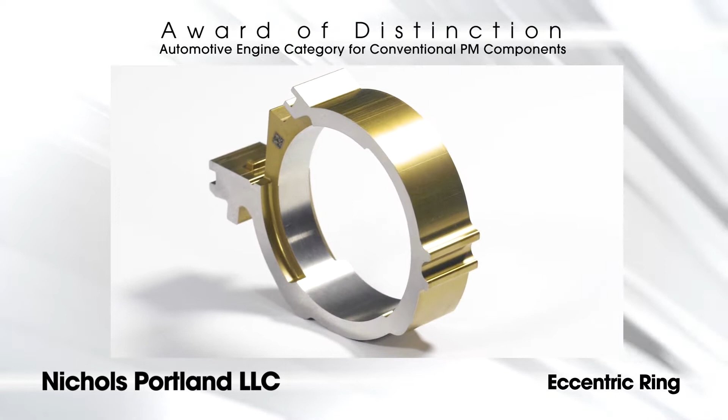Nichols Portland LLC, a division of Nichols Portland Inc., received an award of distinction in the automotive engine category for conventional PM components for an eccentric ring. The sinter-hardened eccentric ring, used in a variable displacement oil pump, has enhanced performance compared with prior generation steam-treated as-sintered components. This improvement in properties was essential to provide increased wear resistance and compressive strength for vane pumps, where rotors are operating at higher speed, lubrication conditions become marginal, and the potential for cavitation erosion is increased.

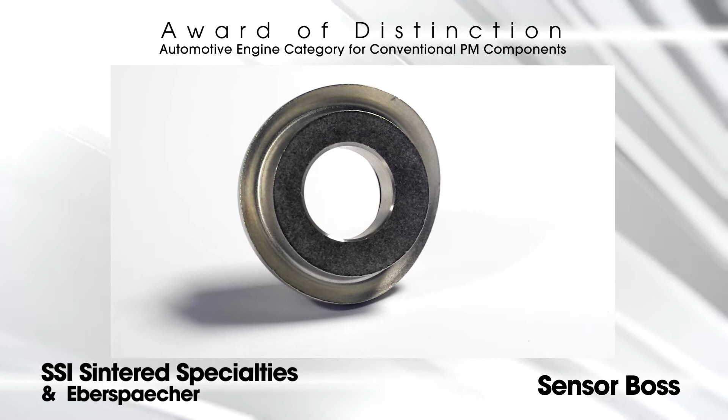SSI Sintered Specialties LLC and customer Eberspaecher received an award of distinction in the automotive engine category for conventional PM components for a sensor boss. The stainless steel sensor boss is welded to an automotive exhaust system and used to secure engine monitoring sensors. During sintering, the parts shrink 5% to their final net shape, except for the tapped hole. 309L stainless steel was selected for its high temperature oxidation resistance, 30% higher yield strength at 1000 degrees Celsius, and it is easier to sinter to high density compared with 304L stainless steel.

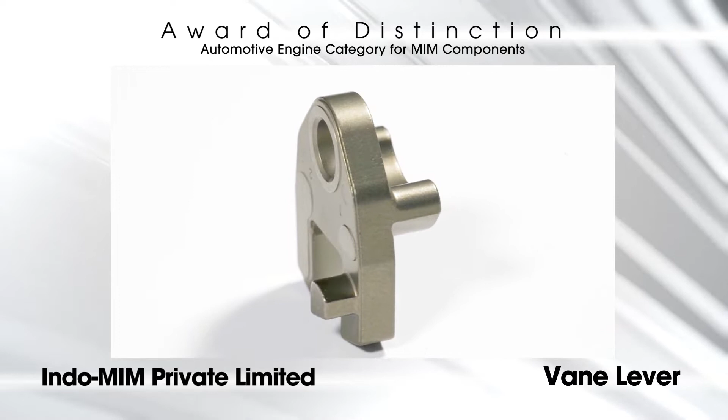Indo-MIM Private Limited received an award of distinction in the automotive engine category for MIM components for a vane lever. Operating at temperatures in the 800 to 850 degrees Celsius range, the vane lever is used as a gas flow controller in the turbocharger of an internal combustion engine. Made from HK30 austenitic stainless steel, the component has good oxidation resistance and strength. The component was previously made by machining wrought bar stock.

Burgess Norton Manufacturing Company and customer Borg-Warner received an award of distinction in the automotive transmission category for conventional PM components for drive and driven sprockets, pressure plate, and sector gear. Used in an automotive transfer case, the drive and driven sprockets, pressure plate, and sector gear provide critical torque management. The warm die compacted and heat-treated sprockets provide strength and wear resistance required in this robust application. Special fixtures are used during sintering of the pressure plate to control flatness and parallelism. The sector gear is 100% verified during end-of-line inspection using a roll tester and master gear.

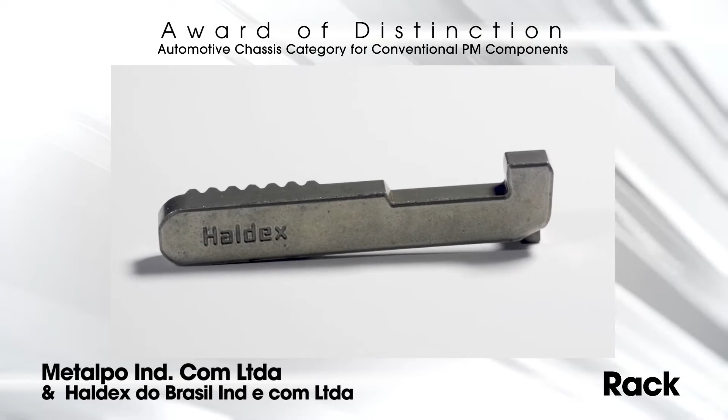Metalpo Ind. Com Ltda and customer Haldex do Brasil Ind e com Ltda received an award of distinction in the automotive chassis category for conventional PM components for a rack. This rack, used in a braking system for trucks, requires high-performance mechanical properties and is made from a warm die compacted diffusion alloy. The rack is case-hardened to achieve good wear properties, but also needs toughness in the core for good impact energy. Density distribution is extremely important to the success of this component.

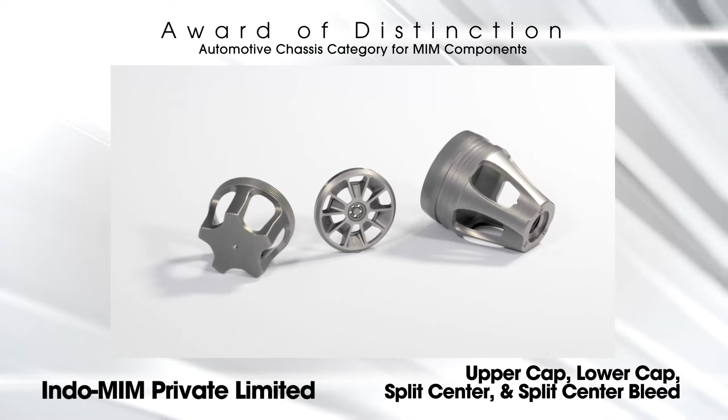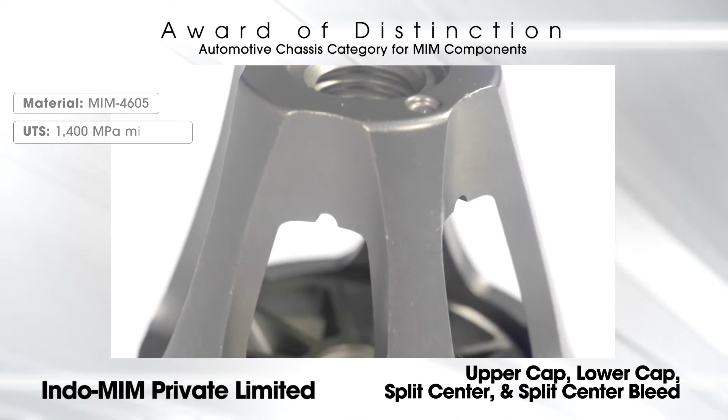Indo-MIM Private Limited received an award of distinction in the automotive chassis category for MIM components for an upper cap, lower cap, split center, and split center bleed. Used in a high-end automotive suspension system subassembly, the upper cap, lower cap, split center, and split center bleed components are made from MIM 4605 and heat-treated. The components need to sustain the dampening force and cyclic load. These highly engineered components are net shaped with MIM, except for the threads. Advanced cooling techniques such as conformal cooling and fountain cooling are used to achieve exceptionally high-quality parts.

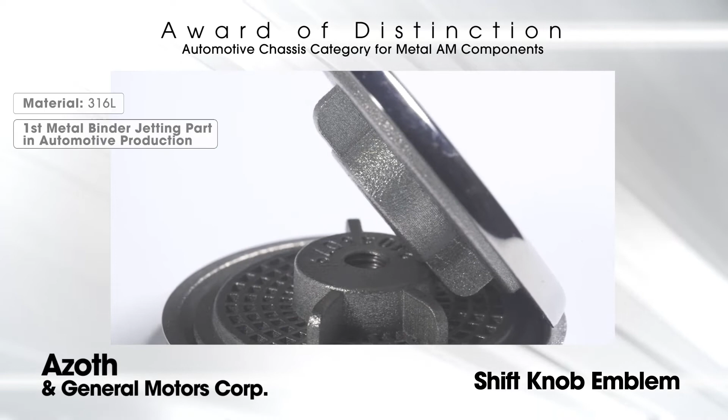Azoth and customer General Motors Corporation received an award of distinction in the automotive chassis category for metal AM components for a shift knob. The aesthetically pleasing manual transmission shift knob emblem for the Cadillac Blackwing V-Series automobile is made by binder jetting using a proprietary 316L stainless steel powder. The part was designed with AM in mind. Other than surface polishing, there are no additional post-sintering operations performed. The finished part requires 4 different surface finishes: a mirror finish on the outside and top ring features, a blasted surface in the deep background features, a brush finish on the center bridge, and an as-printed finish inside the debossed letters on the outside.

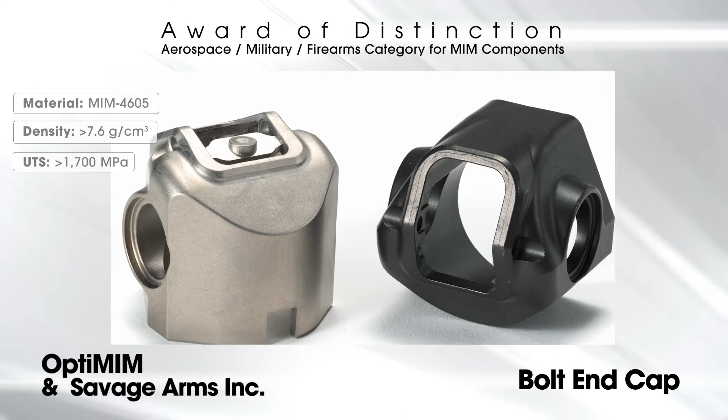OptiMIM, a Form Technologies company, and customer Savage Arms Inc. received an award of distinction in the aerospace, military, firearms category for MIM components for a bolt-end cap. Used in a commercial SPR impulse rifle, quench and tempered MIM 4605 was the material of choice for this bolt-end cap. As a component within a firearm bolt assembly, superior mechanical properties are needed for durability and reliability, and cost is important to meet commercial viability. High-quality tooling and advanced processing provide an excellent surface finish, requiring no deburring and minimal secondary operations after sintering. The large inner diameter is sized, and one of the smaller diameters is reamed to a very tight specification prior to the final coating.

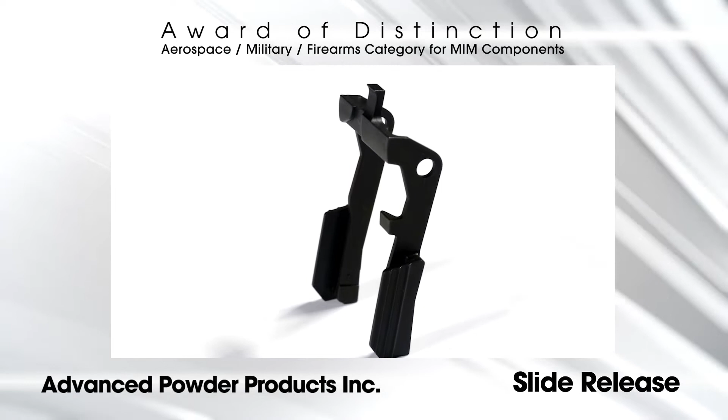Advanced Powder Products Inc. received an award of distinction in the aerospace, military, firearms category for MIM components for a slide release. It was originally designed for stamping, but the complex geometry was too much of a challenge. This one-piece firearm slide release is made from an air-quenched and tempered S7 tool steel, as it experiences stress when the firearm is fired. The one-piece design allowed better quality assurance by making the assembly process simpler than a multi-piece assembly.

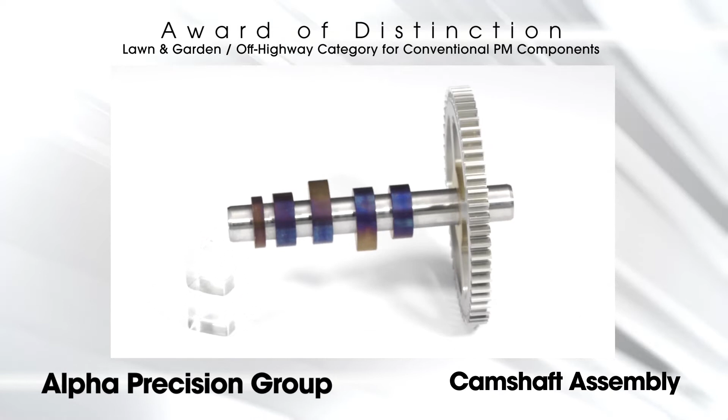Alpha Precision Group, a division of Nichols Portland Inc., received an award of distinction in the lawn and garden off-highway category for conventional PM components for a camshaft assembly. This camshaft assembly, used in a family of lawn and garden engines ranging from 19 to 27 horsepower, utilizes 6 PM components, a cam gear, 4 cam lobes, and a thrust washer.

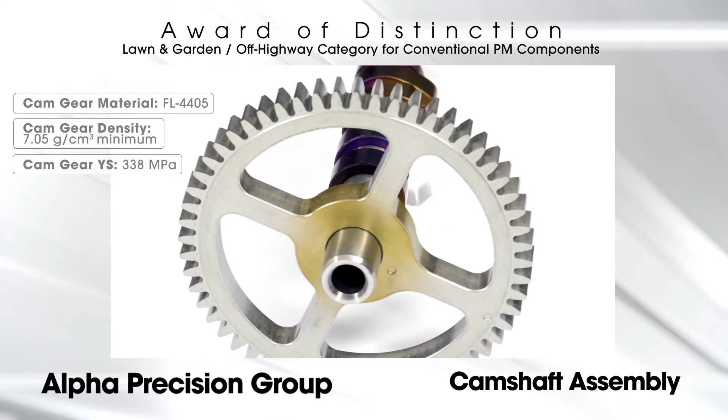Each component is fixtured robotically, induction heated to expand the IDs, and pressed onto the shaft at the specified clocking and axial positions. Engineered interference fits are achieved when the parts contract as they cool. The assembled camshaft weight was reduced by 500 grams compared with the cast iron design.

FMS Corporation and Customer Team Industries received an award of distinction in the lawn and garden off-highway category for conventional PM components for a spider dampener insert. The spider dampener insert is part of a torque subassembly for all-terrain vehicle transmissions. The spider transfers torque from the ATV engine to a secondary clutch.

The PM component provides the interface between the shaft clutch and the internal spline. The part was originally designed as a metal casting that required extensive secondary machining. However, after initial testing, the part was redesigned for PM, eliminating the need for the machining operations.

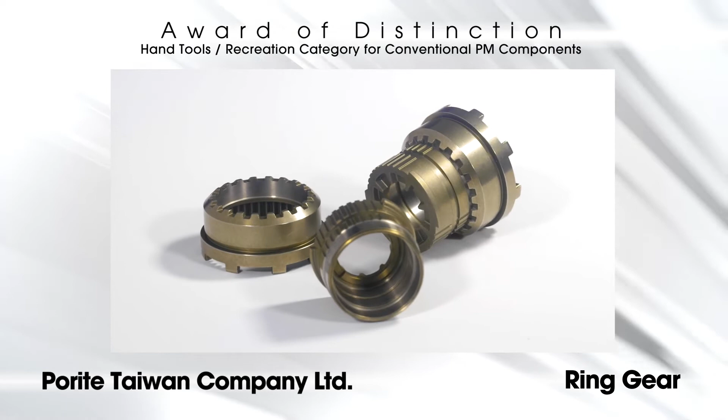Porite Taiwan Company Limited received an award of distinction in the hand tools recreation category for conventional PM components for a ring gear. This ring gear, used in the gearbox of a cordless drill, is divided into 2 parts due to the multi-section appearance. The 2 PM parts are machined, pressed for alignment, followed by a plastic injection molding operation. The gearbox side of the assembled part serves to control deceleration and speed changes, and the output side is used to select the corresponding interface.

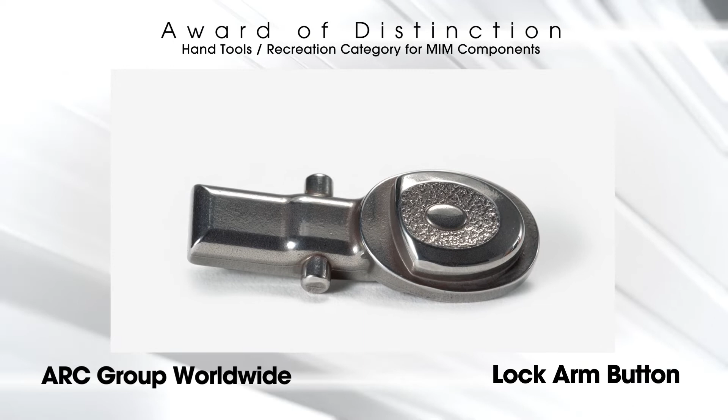ARC Group Worldwide received an award of distinction in the hand tools recreation category for MIM components for a lock arm button. This lock arm button is a functional portion of a blade lock used in a pocket knife. When depressed, the button fires the blade open or allows the operator to close the cutting tool safely.

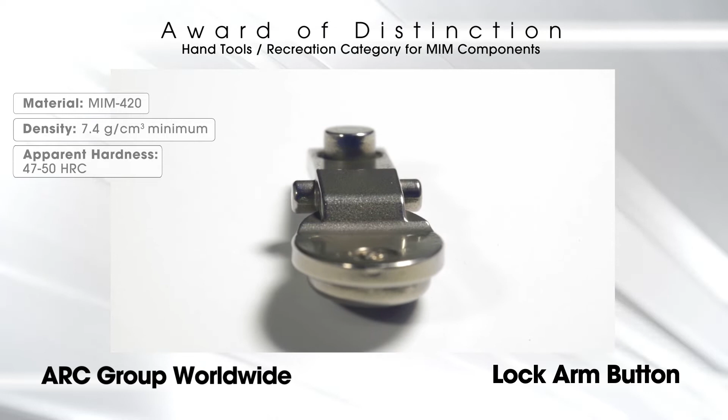An internal plunger system is responsible for lockup in both the open and closed positions. No secondary machining is required, including holding the 3 post diameters to a tolerance of plus or minus 0.05 millimeters. Glass bead blasting is performed post-sintering.

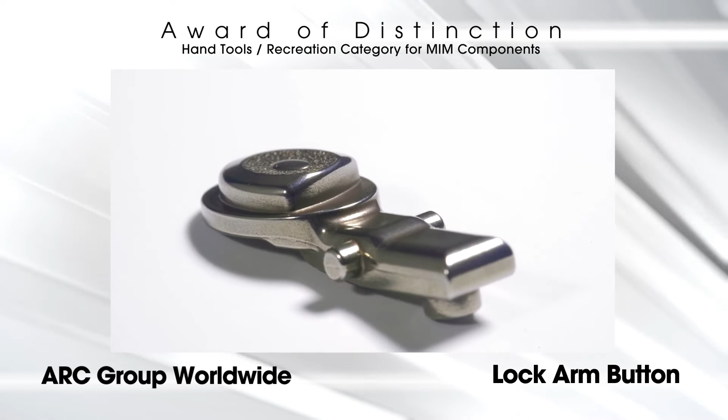Amaero and customer Sankuer Composite Technology received an award of distinction in the hand tools recreation category for metal AM components for a guitar tuner. The laser powder bed fusion skull guitar tuners could be made from a range of materials, as their main function is more decorative than structural.

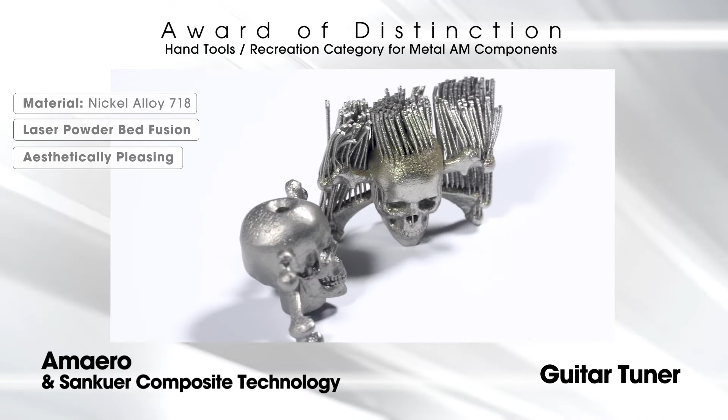Their purpose is to turn the gear assembly that adjusts the string tension of the guitar. Polishing and plating can be performed if needed. Metal AM allows for a quick iteration of design without investment in tooling, and increased complexity does not come at a higher cost within the same design envelope.

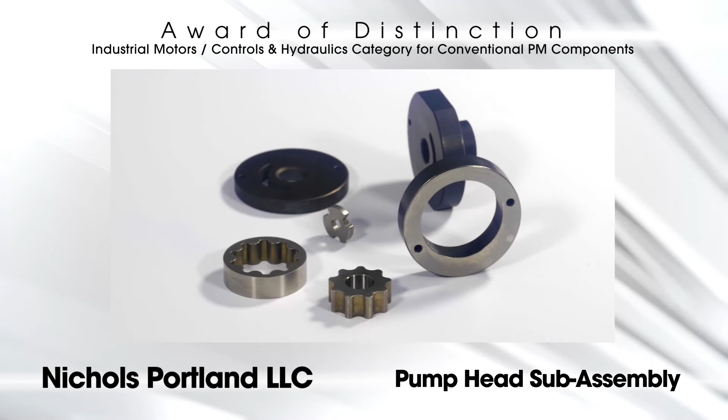Nichols Portland LLC, a division of Nichols Portland Inc., received an award of distinction in the industrial motors, controls, and hydraulics category for conventional PM components for a pump head subassembly. This pump head subassembly for fluid delivery consists of 6 PM components, an inlet plate, eccentric ring, inner and outer gear rotors, a spline coupling, and an outlet plate.

The challenges in producing this family of components are primarily associated with the need to achieve a high level of dimensional accuracy and tight control of axial perpendicularity during the compaction, sintering, and heat treatment operations. Secondary operations include face grinding for all components except the coupling and ID turning, honing for precision bores.

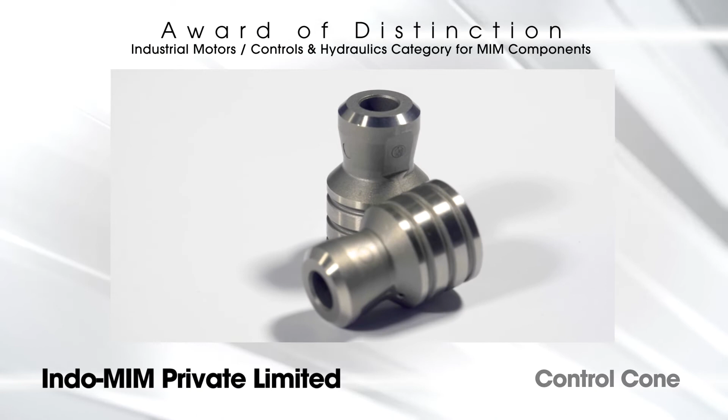Indo-MIM Private Limited received an award of distinction in the Industrial Motors, Controls and Hydraulics category for MIM components for a control cone. Used as a fluid controller in a fuel pump, this control cone is a highly complex component with a cylindrical stepped outer diameter that varies like a dovetail towards one end.

The part was previously machined, and producing the angular hole through high-volume machining was difficult. MIM is far more suitable for high-volume production, lower cost, and most importantly, reduced lead times without compromising quality.

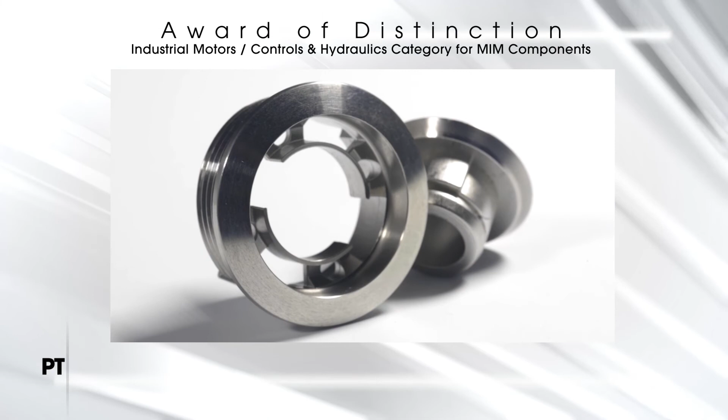PTI and Customer Elevator Products Corporation, a division of Schindler Elevator Corporation, received an award of distinction in the Industrial Motors, Controls and Hydraulics category for MIM components for an elevator button assembly. This elevator button assembly is impervious to solvents and disinfectants. These parts solved a problem encountered during the COVID-19 pandemic.

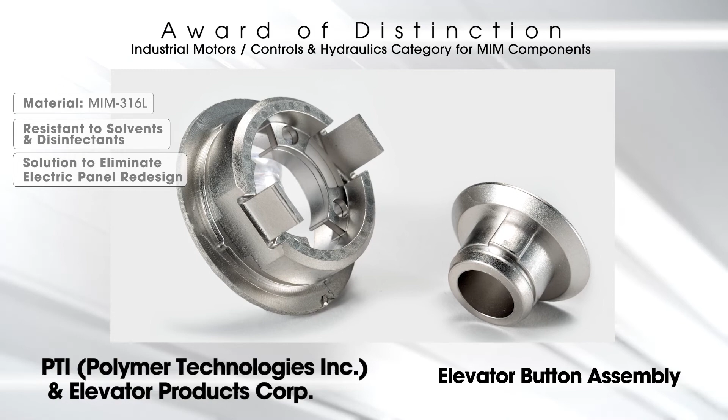Elevator button assemblies machined from stainless steel and overmolded with polycarbonate threaded inserts were being degraded by various solvents and disinfectants used excessively to sterilize highly touched areas in elevators. To eliminate polymer overmolds, flexure retaining tabs and assembly threads needed to be redesigned and incorporated into the stainless steel button body design. Metal AM prototypes were utilized to determine the assembly design prior to production moving to MIM.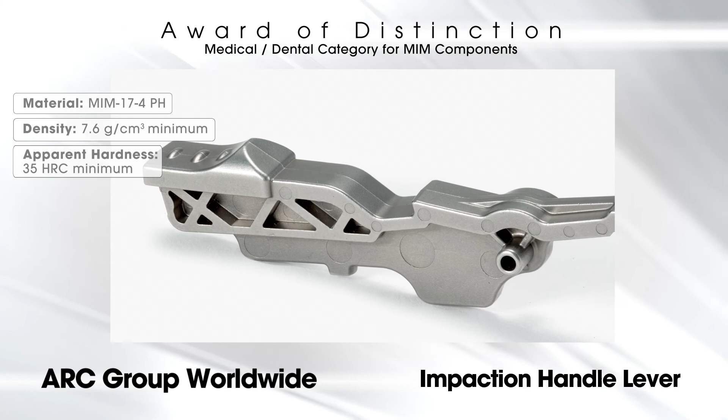ARC Group Worldwide received an award of distinction in the medical dental category for MIM components for an impaction handle lever. This impaction handle lever, used in knee replacement surgery, represents one of the first single-use instruments converted from plastic to metal injection molding. Given the component's application and requirements in the medical field, precision, process capability, and strength are

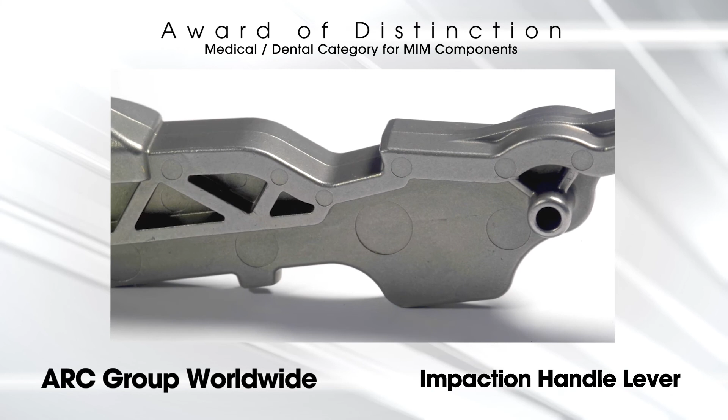of extreme importance. Despite the complex nature of this component, no secondary coining or bending operations are required to maintain tolerances, and the MIM technology will save an estimated 40% in cost over traditional manufacturing methods.

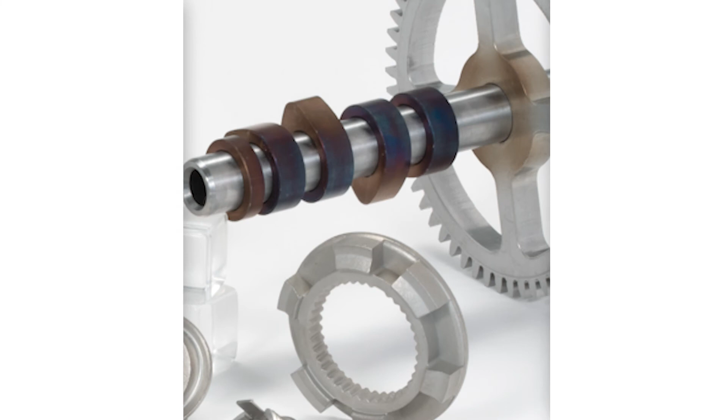Ladies and gentlemen, these are the winners of the Awards of Distinction in the 2022 PM Design Excellence Awards competition. Please join us in acknowledging their achievements as company representatives accept their awards.